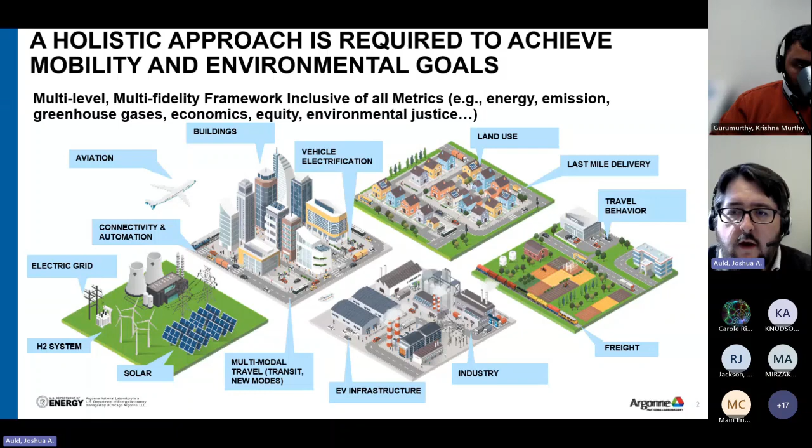So this work really resolved itself into the implementation of a workflow. And this was done through the last 3 to 6 years of funding as a part of the Smart Mobility Consortium, which came out of a lot of the work under the U.S. Department of Energy Energy Efficient Mobility Systems Program. This was a large project, multiple national labs. So, we worked with 3+ national labs, over 12 universities, and connecting many different tools to develop an end-to-end and flexible workflow that enables us to look at system-level exploration of decarbonization strategies and energy efficient strategies and mobility productivity strategies for the transportation system.

Now, this is a workflow that runs all the way, at the far end, from infrastructure deployment, long-run land use changes, vehicle market evolution, flowing through the center of the workflow in agent-based transportation system modeling, where we're looking at how travelers, goods movement, and system controls interact to realize a mesoscopic representation of transportation systems, all the way down to the micro level, whether that's microscopic traffic flow modeling, detailed vehicle modeling, and multi-vehicle controls.

So how all these things come together to generate vehicle energy consumption, but also many of the other metrics that are of interest to our sponsors and stakeholders as well, whether it's the traditional mobility measures around congestion, delay, hours traveled, miles traveled, and so on, or things like cost, energy, emissions, and more, and how all of these technologies and policies that we're exploring affect equity, accessibility, and so on. So as I mentioned, this is a large-scale workflow running from the high-level, long-run infrastructure change down to the day-to-day and micro decisions. So this requires a lot of tools and a lot of data, where the work has been to connect these and to create a holistic and coherent system of models to generate this workflow.

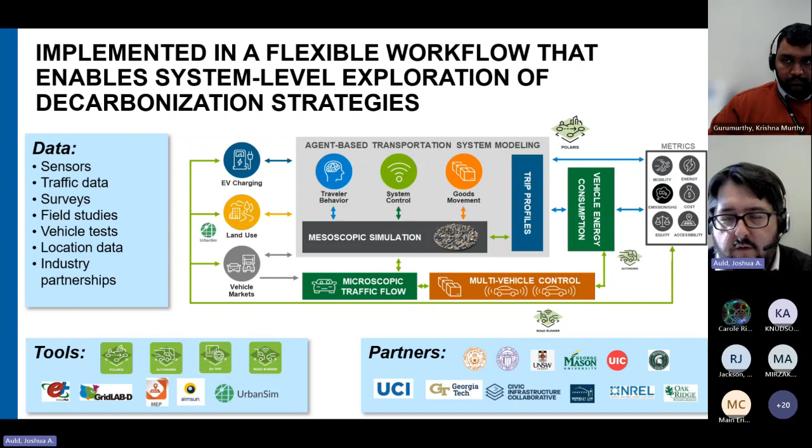So why do we feel that this workflow is unique? There are a lot of examples of model workflows and other tools in the transportation sector and other sectors. What makes this tool unique, at least from our perspective, is the inclusion of a full-featured activity-based model for passenger travel, but also for goods movement and other operators in the system as well. So we include the freight shipments, we connect it to vehicle energy consumption, which greatly expands the type of analyses and metrics we'll be able to generate.

And all of this is done through a full integration between the demand, network assignment, traffic flow, and other movement aspects of the system. So it's not a series of disconnected tools with a loose coupling. It is one consistent and holistic, continuous representation of all the movements in the system.

We've also connected this through that workflow development into larger scale tools, modeling land use changes like UrbanSim, vehicle energy consumption through Autonomie, and many others. So it's this full integrated agent-based implementation that provides a unique set of capabilities when we're doing studies for many of our users and stakeholders.

All of this would not be possible without the significant investment and effort we've put into enhancing the computational performance of the tool. So as I mentioned, it is a fully agent-based platform where there's a core underlying agent-based discrete event engine software that everything sits atop. That's implemented in a high-performance C++ code base, which allows us to run very large-scale models up to 100% of agents for a large city like Chicago.

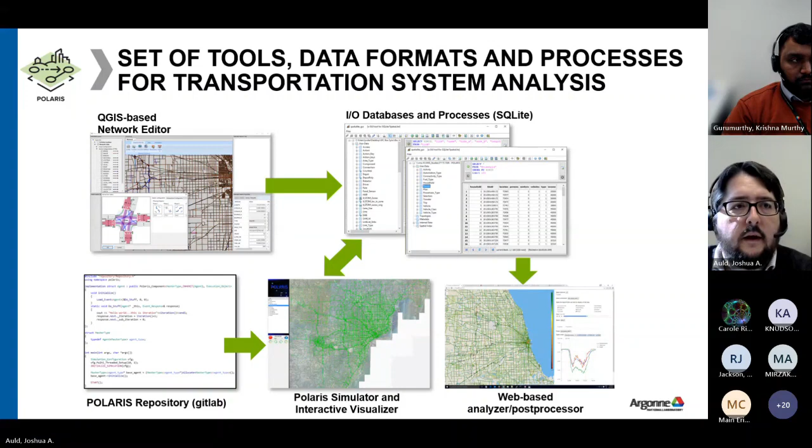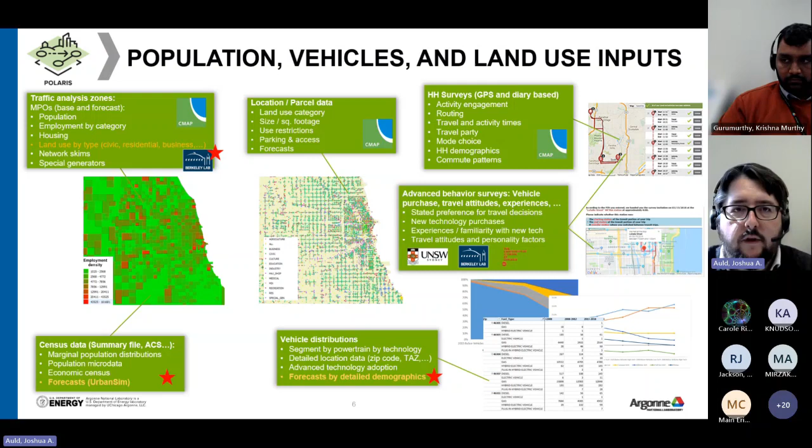Quickly, just some example inputs. I think we're all familiar with the type of data that flows into these things, whether it's traffic analysis zone, location and parcel, or even building level data. The many household surveys, on standard diary, but also advanced surveys on decision making and trade-offs and adoption of new technologies and so on. Vehicle distributions around different vehicle registrations and powertrains and what segments of vehicles. So all of this flows in to generate our populations and the physical environment when it's combined with the network and mode modeling inputs that Polaris uses to simulate.

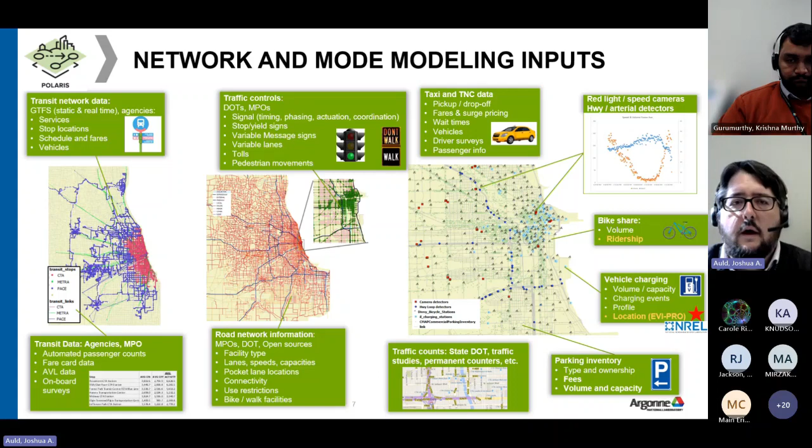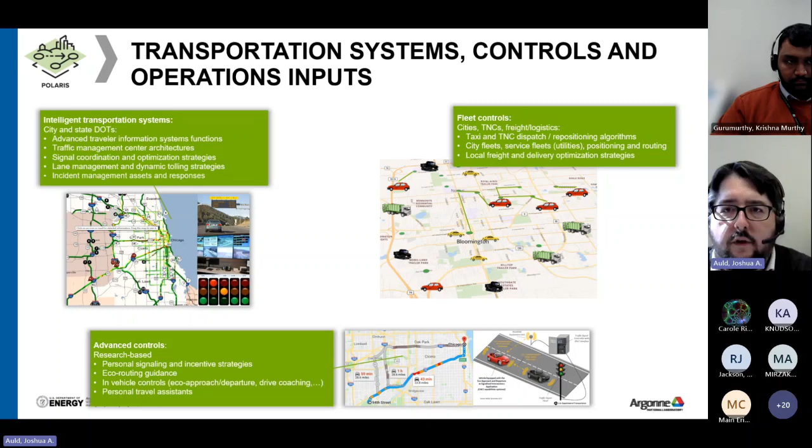So this is just an example of many of the traffic data, network elements, transit networks, and other network data for the various modes that flow into the Polaris model. And there's always capabilities to expand this as well. In addition, we also have transportation systems controls represented as ITS elements, whether that's signs, a management center, or flexible lanes or many of the other technologies, along with more advanced research-based controls like roadside units and vehicle-to-vehicle and vehicle-to-infrastructure communication. So there are facilities to ingest all of this data into the model.

Many of the other models are at a similar state of readiness, especially Austin, Dallas, and Atlanta, where we have direct partnerships with some of the MPOs in the area, and many different regions across the country, working either with industry, with local universities, or in many cases both, to develop models, ranging from the smallest scale in Greenville, South Carolina, all the way up to the Los Angeles model, which I think has over 18 million agents in the simulations, and even a statewide model being implemented for Indiana in partnership with Cummins Inc. and Purdue University to look at electrification of travel corridors through that region.

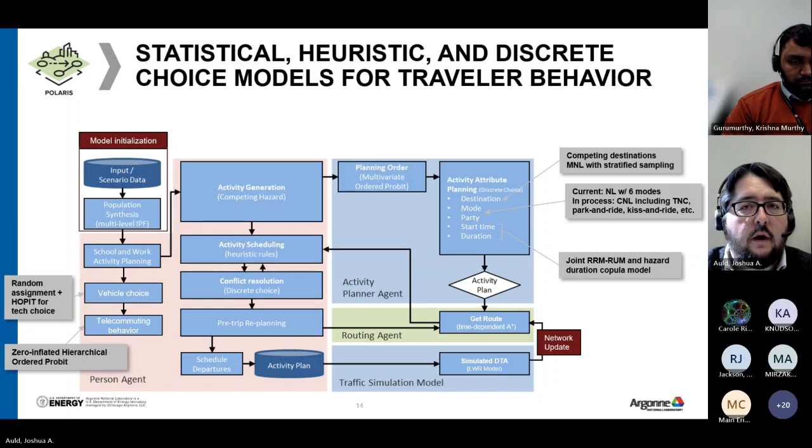I think uniquely in this system, we also implement that agent-based sequence of decisions, interactions, and adaptations on the dynamic multimodal traffic assignment and simulation side as well. So we have a fairly detailed person-based time-dependent intermodal A-star algorithm that is used to route individuals through the system, and that's independent of the mode chosen, and those can be multimodal trips and so on.

And that has a weighting characteristic between previous observations, current system information that's being passed through, whether app-based navigation or system-level controls, as well as prospective route planning and route guidance. So all of these are taken into account at the individual level, and individual route decisions are made. People travel along those routes. They continuously update those routes based on unexpected or changing conditions, and complete their trips to give us the realization of the KPIs of interest there.

And that is continuously integrated with the transportation simulation. So whether that's movements on a road link, whether that's moving through the transit system on a train or a bus, or even just going to a dock facility to grab a bike or an e-scooter, all of these are simultaneously updated in terms of their link performance and edge costs, as well as feeding back continuously into the route choice decision. So this is agent-based dynamic multimodal traffic assignment that we've implemented here.

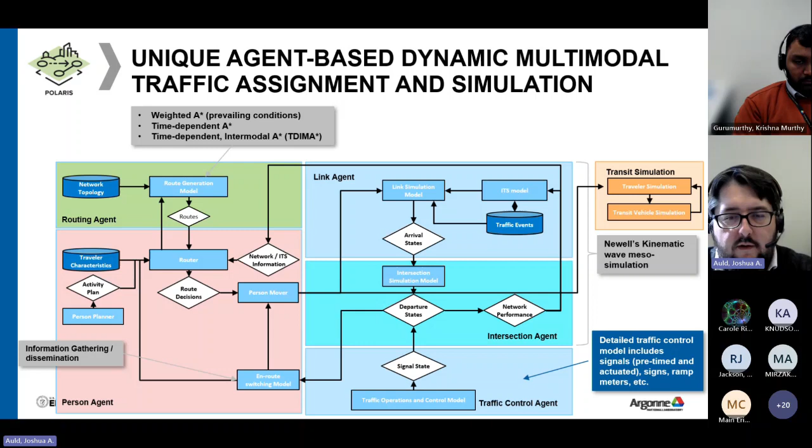That leverages a lot of work that was done on the traffic flow simulation side. I won't go into too much detail on this, but we do have an implementation of the LWR model that's been extensively updated to allow for intersection controls and individual vehicle follow and speed spacing behavior, basically. So by reparameterizing this model into a Lagrangian coordinate system, so basically transforming the fundamental traffic diagram from a flow density to a speed spacing relationship, and then having different relationships for each vehicle class. So it's a continuous differentiation of how the vehicles behave.

We can represent the impact of a lot of new vehicle technologies, which was previously difficult to do in a meso-type, non-complete micro simulation implementation, while still maintaining a lot of the speed and performance characteristics of a meso simulation.

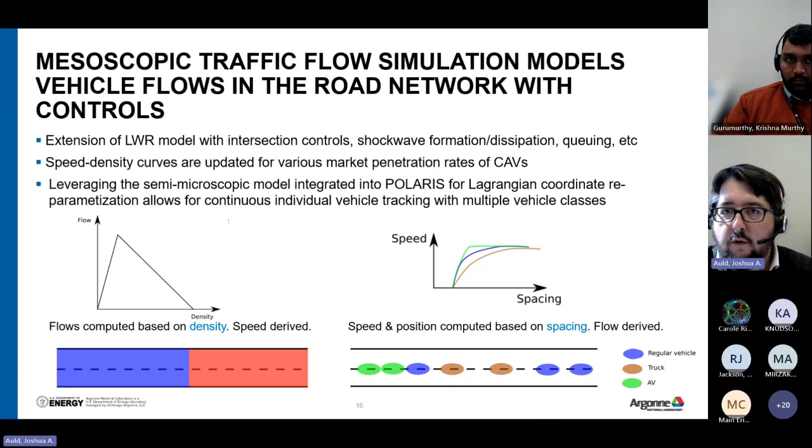I mentioned previously about this time-dependent intermodal A-star, so I won't go into too much detail on that. Just to say it's a fairly detailed route choice algorithm that accounts for different information and learning strategies across different modes within the system that's continuously running in the background, and leveraged for our agent-based DTA convergence algorithm, where we're running model in ABM loops, DTA loops, and trying to come to some skim convergence and other convergence gap measures to say when we've hit a stable solution in the model system.

And one final point on the larger model development is we do have this land use integration. So we have direct capability to integrate with the UrbanSim model and pass outputs back and forth between UrbanSim and POLARIS in terms of the updated populations and updated population decisions, network performance and travel times. And we're currently working on a few research projects with them to pass more individual, even accessibility or utility-based metrics to say where do individual households choose to live and work. But there is that capability of working directly with the UrbanSim model or other land use models as needed.

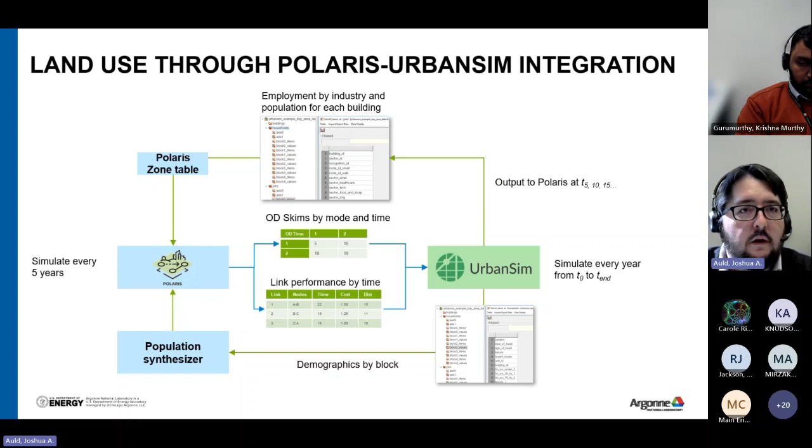On the freight side, as I did mention, for the overall workflow, that was representative of the passenger travel, but on the freight travel, we have a similar set of agent decision-making strategies. So this is somewhat equivalent, where we go from the strategic long-run level about choices about how large is my enterprise, what goods are we producing and consuming, how do I generally form my partnerships in supply chain and logistics, so who do I trade with and where do I source materials from or sell my materials to, and what assets do I own, things like distribution centers, fleet assets. So how many trucks do I own for shipping if I'm going to be involved in that, and so on.

Then there's the tactical decisions, which is more the midterm choices around procurement, production, and logistical arrangements. And then the operational decisions about how do I actually schedule vehicles on tours, when do I dispatch the trucks, and how do I organize my delivery tours, and so on, to get goods to the consumers.

So the high-level cartoon flow on this side looks fairly similar to the passenger side, but we start with the firm synthesis. Those firms then generate their asset choices, and conditional on that, they have fleet and depot electrification decisions and supply chain partnership formation. So whether I own shipping assets or not will influence what type of supply chains I engage in, but then we develop our supply chain connections between all of the firms in the simulation.

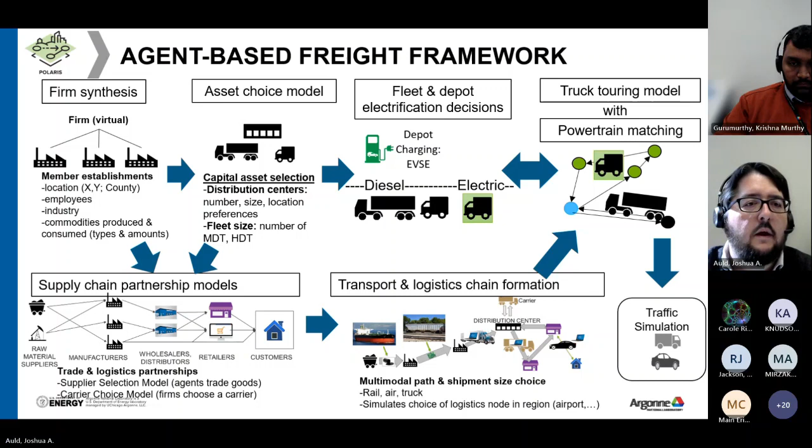So I touched on that briefly in the last slide and in the passenger side, but we do extensively handle electric vehicle deployment and charging simulation. So we model the EV consumption. As different agents or shippers are moving around, either traveling or delivering in an electric vehicle, we model continuously the consumption, the state of charge of that battery, and what effect that has on the travel day.

So does it occasion the need to do an EV charging trip? Do we wait at the charger or go to a different charger if it's congested? And even larger scale decisions. So if we step back to that strategic level, based on current demand or projected demand, where do we place chargers to get optimal performance, either revenue or minimize deflection time or minimize wait time, depending on what the target

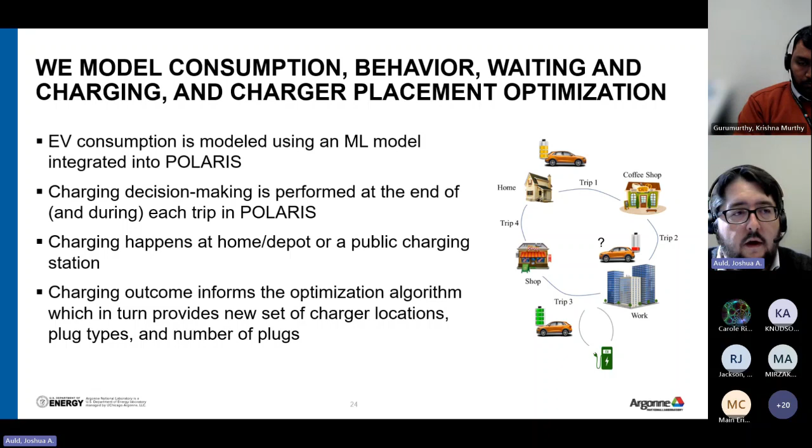function happens to be. But all of this is modeled directly in Polaris using an ML model for vehicle energy consumption that's connected, co-simulated with the Polaris model. There's also a battery charging model. So we do, again, as I mentioned, calculate link by link energy consumption, and then based on that, engage in charging decisions and simulate the charging event.

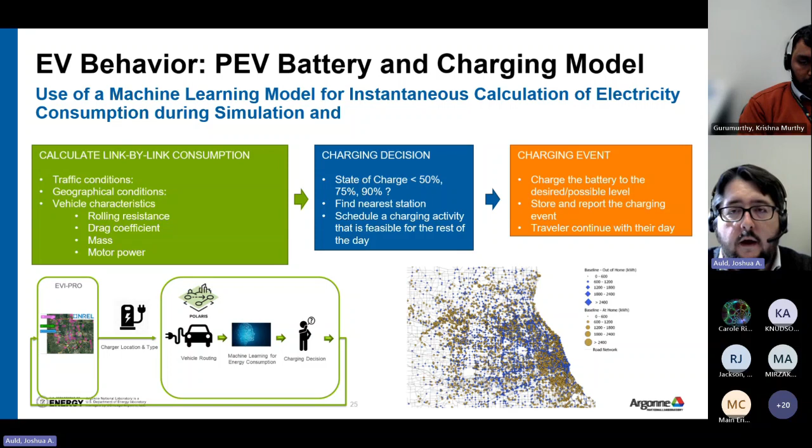So a traveler can decide to charge or a truck can decide to charge. And then it needs to engage in the search for the nearest charger, see how the travel to that charger aligns with the rest of the activity plan for the day, modify that activity plan as necessary, and then engage in the charging event when the time comes for that. And this is extended to shared fleets, transit fleets, local delivery fleets, and business-to-business fleets, and so on.

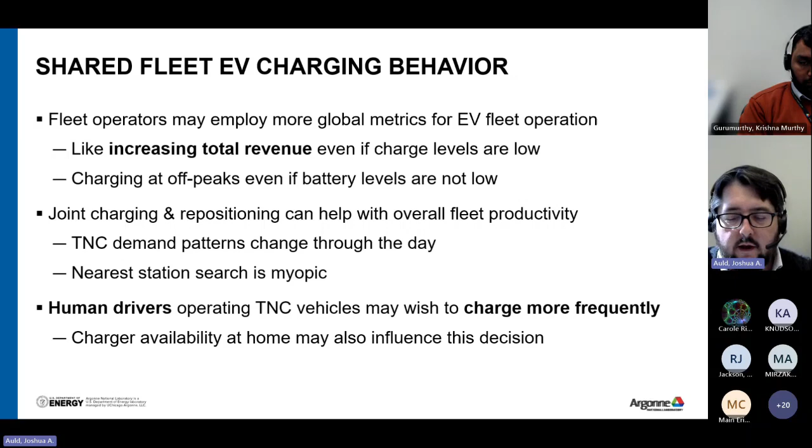The example here shows how we do that for the shared fleet charging behavior, but again, the same decision-making can go into updating transit schedules. So we have several studies we've done on bus electrification, which I'll show an example of later in the slides. But all of these fleet control and fleet strategic level decision making can be influenced by the availability of electric vehicles as well.

And just very quickly, what makes that possible for us is our integration with the Autonomie Vehicle Energy Consumption Performance and Cost tool. Autonomie is a US DOE supported and preferred tool for vehicle level simulations. This has been developed over 25 years. It's a long-running tool licensed to many organizations, including many of the automakers, different universities, other companies, component makers, and so on, to do model-based design and evaluation of vehicles and an assessment of the energy consumption and cost for different powertrain configurations.

So this is a tool that goes into a lot of the CAFE regulation, for example, to identify current and projected future performance characteristics of different powertrain configurations, so it is a forward-looking tool as well. On top of that, we have built an AI-trained version of this model for a more limited subset of vehicles. So it's not a full design and analysis tool, but for a representative characteristic set of electric vehicles, we have this model running continuously through TensorFlow connected with Polaris to simulate the energy consumption for all of the EVs in the system.

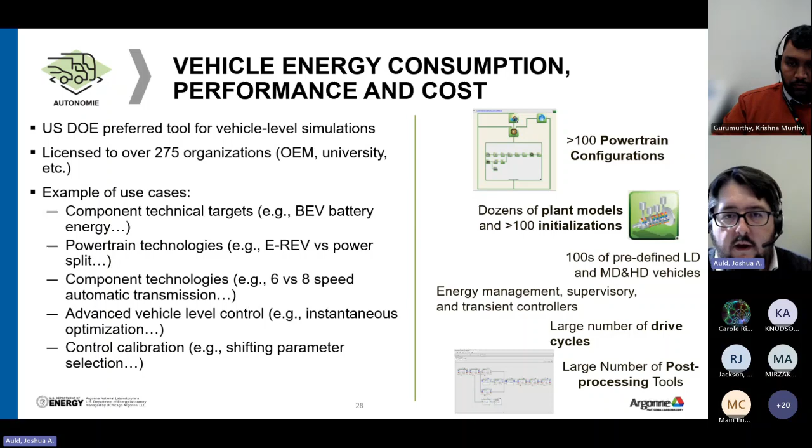So maybe pause for questions there. That's an overview of the Polaris tool, and I'll just go quickly into a couple of case studies if there are no questions from the audience. I think you can answer one question on the history of Polaris and whether it was based off of TRANSIMS.

So Polaris was not based off of TRANSIMS. Polaris started as an outgrowth of the TRANSIMS research and deployment support project from Federal Highway. So it does share commonalities with TRANSIMS data formats, since we were the team supporting a lot of the deployment of TRANSIMS to various public agencies. We used that as a start point, but none of the code base or solution algorithms deployed in Polaris share any commonality with TRANSIMS. It just started out of the same program.

I think someone's raising their hand. Sure. Yeah. If you call those out, because I can't see them with my shared screen. That's me, Alex from Oregon Department of Transportation.

So I don't want to jump ahead. If you're talking about case studies now, maybe calibration, validation will be coming up. But I guess one of the things in my mind is just this all sounds very good. But I think from our experience, the theory and the coding is really only like 10% of the workload. Like 90% of the work is in, like Becky's had a lot of questions around, where's the data to develop all these relationships and to validate, to check against.

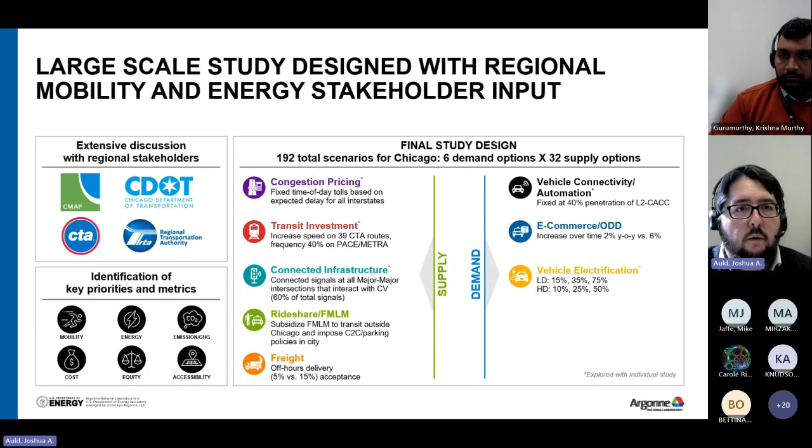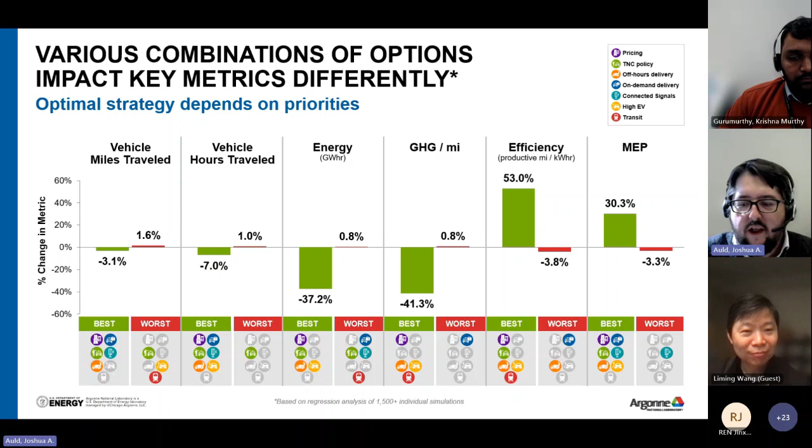It's a very interesting topic, something I like to work with a lot. We have an advantage here in that we have large computers. We can run thousands of these. I think I mentioned with this model here, we show best and worst, but this was based on, I think, 2,000 something final runs of this model. So there's a lot of data to characterize this uncertainty. Characterizing it and trying to reduce it where it's applicable are something we focus on. Thank you.

So there's one more question. Please. Ali? Hi, this is Ali Mirzakhlili from DEQ, Environmental Quality here.

Question for you: there's a behavioral aspect that drives some of the decisions through the model. How do you assess things like safety, and can you simulate changes that would impact the behavior, and how would they impact, for instance, transit choice? Micromobility, walking, those choices we see a lot of in travel surveys. Do you drive in a single occupancy vehicle, or do you go by transit?

Well, the answer may be by car, because we don't have safe access to transit. If we provide that, how do we assess it? Is there a place here where we can simulate that and say if we increased this, then this is how the behavior would change?

Yeah, that's actually a very interesting research question for us, and something we partner with quite a few different universities on. One project Murthy has led from our side, trying to understand these motivating factors that underlie decision making and actually accounting for that in our mode choice models, is always a focus of the work. We have an ongoing review of the mode choice model right now to incorporate a lot of the one-off research explorations that have been done by our partners.

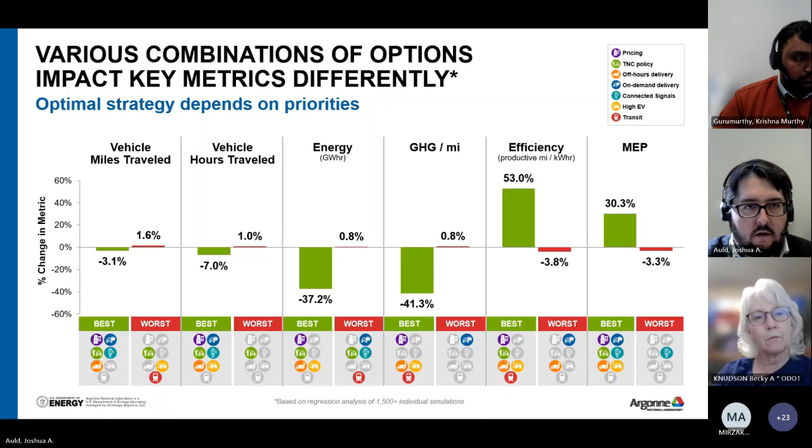So technically, is there a practical significance to a 1% increase in vehicle hours traveled? Probably not. Technically, it is a statistically significant finding from the model, but very marginal. Gotcha. So anything that fell below the significance threshold wouldn't be included here. But these are very borderline. And actually, let me step back. This one shows it most directly. These are the statistically significant impacts of these different parameters here.

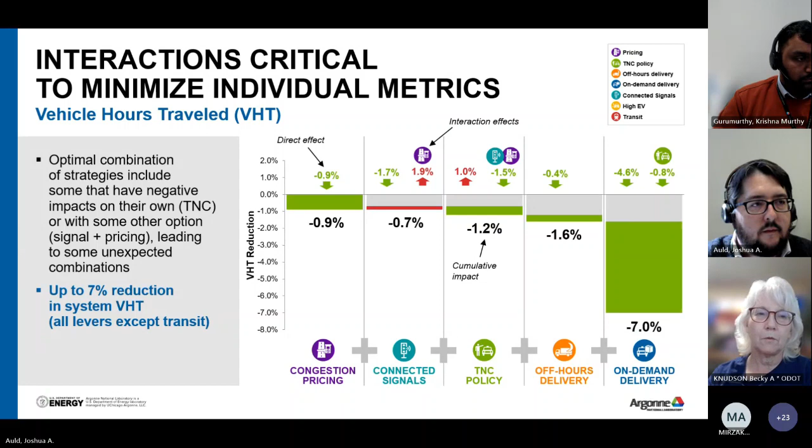All right. Any other questions in the chat, Murthy? Oh. Alex, did you have one or two you wanted to? Sure. Yeah, I could. So the question that's in my head, lots of questions. So I'm sure we can fill up the time.

But I guess just jumping to the big question in my mind: what's the opportunity here? I'm curious, from your perspective, where would you like to see this move forward? Just as some context, you might be aware Oregon is currently spending about $6 million on a statewide travel survey for 2023-2024. So we're going to have brand new, fresh, post-COVID travel behavior information.

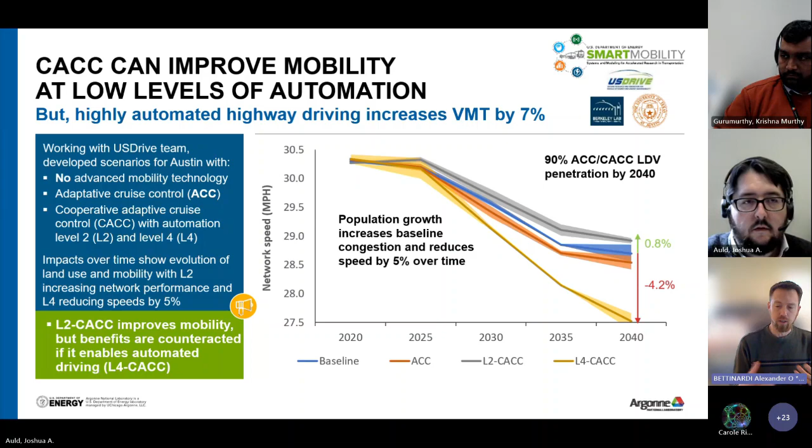So it comes in different forms. Let me take this Los Angeles deployment, for example, which is something where we partnered with UCI, and they partner with SCAG to do this model. And actually there's a fleet partner involved as well, to develop and deploy this model. But the funding is really to do this as part of a research grant, right? There's actually two projects there. There's one looking at regional freight delivery and one exploring vehicle connectivity and traffic control strategies. That's an example of a model developed with local partners driven for a specific research outcome.

Dallas and Atlanta, in contrast, are actually DOE-funded projects where they want us to explicitly work with this MPO, try to get the tool in their hands, get their staff trained up and able to use it and deploy it for specific studies, and get feedback on what the tool needs. So this is more like a beta testing of the tool as a deployable platform that can go out and get into MPO hands. So the funding there is for the tool improvement.

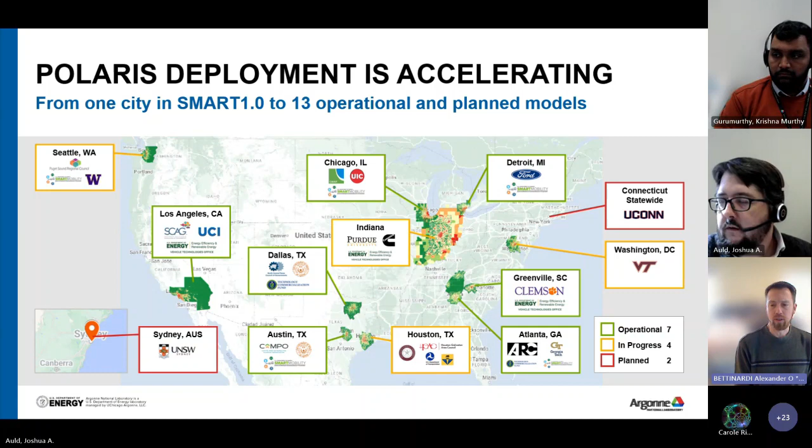Great. Yeah. Again, I have lots of questions. So I have two other questions, a little more technical as opposed to policy funding. But I'll pause since I've been holding the mic. But I do have two more technical questions if there's time. I don't see any other questions.

So. Sure. So one thing in our design that we're really interested in. This is a good slide for that. I appreciate you clicking back to this slide, somehow knowing where I was going. One place that we're focusing a lot of our interest and trying to improve our modeling capabilities is around better representing how people make bike choices, specifically, and trying to represent how comfortable individuals are, and not assuming that every individual will get on a bike if they are given the infrastructure, but identifying that some people, for different reasons, would never take a bike under any situation.

Anyways, just as an example, but I'm just curious, what if any of these cubes have to do with improving active mode representation, or what have you done to maybe push the research when it comes to biking and walking? Yeah, a lot of that. So let me step back. There are aspects of bike ownership and bike use within a few of these cubes. So we do have it as vehicle choice, but it's been a while since I've updated these slides, that's more like mobility choice.

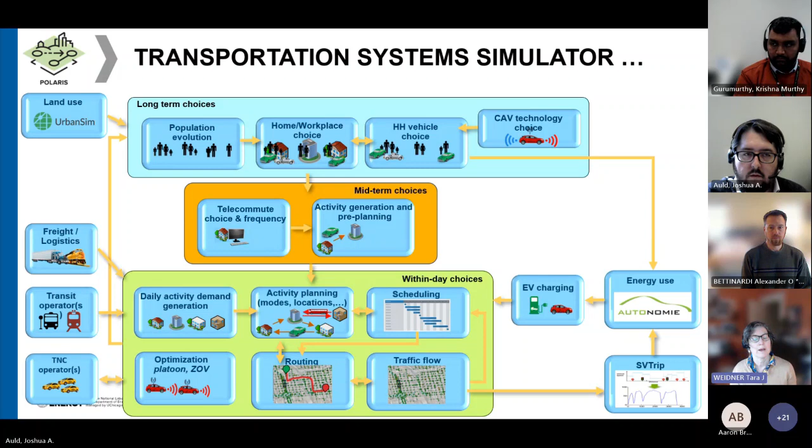Yeah, good morning. Thanks for this presentation. It's a pretty impressive tool. I guess I'm building off of where you were going with Alex a little bit, about how it's a research tool in a lot of ways because of its heavy footprint, but it might be able to help with some of the questions that our traditional tools don't. So some of the insights that you've already shared in this presentation, is that shared out in any way? Is there a place where you're keeping some of this information?

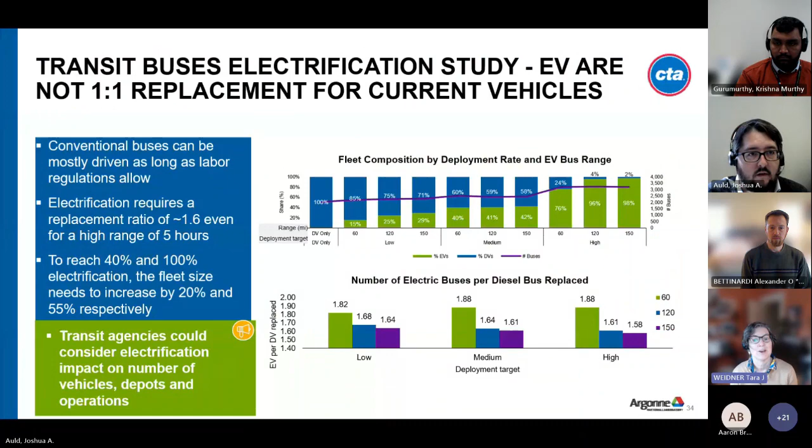And then if we had particular questions, like, hey, we're struggling with this input in our model that we can't exhaustively look at, you might look at the 5 or 6 models you have and give us a pretty good range to put in our model, for instance, that might not be specific to our area, but could at least give us a pretty reasonable range for some assumptions.

Yeah, I would say we try to be pretty proactive about publishing everything that we do. So there are papers on almost every aspect of the model, maybe not some of the newer things we've been adding, which are in the works to publish, but we do try to have everything online. So all the papers we publish are available on OSTI.gov, the U.S. government funded research site. References to those are available on our website.

I don't know, Murthy, if you want to put, well, I guess someone found the link there, so maybe it's in the chat already, but we do try not to have anything held back in terms of what the models look like. We describe how all the models are estimated and what the actual models that go into Polaris itself are, and any of the studies that we run. So even the large scale Chicago area study, there should be a paper coming out; hopefully it was submitted for presentation in the next couple of months, so we'll see when reviews come back. But yeah, all of this can be shared for sure.

Sorry, go ahead. Right. Yeah, that's maybe where you're going too. Like, help point us to which one might be relevant to a question that we're asking. Would that maybe be through the forum, the library? Well, that's just going to be a listing as well. Just wondering if you guys are operating at all like a sort of resource to help point people to studies that might be relevant, because there's a lot of information. A lot of it is more background of how you arrived at the tools. And I'm really looking for those nuggets of gold, in particular as questions come up.